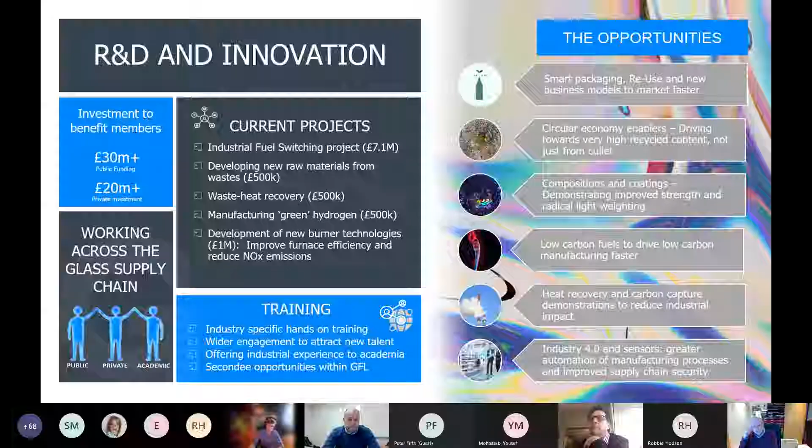To give people an overview of the St Helens pilot plant development, what's important is that over the course of this process, we are co-designing this not just as a Glass Futures internal team, but also utilising the resources and technical expertise of our members, who are heavily involved in a number of extensive design sessions. We also want to open this out to the wider industry in a session like this to ensure that we get the best knowledge and build something that is truly built to serve the industry upon which it is based.

So the facility itself will open in 2023. Over the course of the next 2 years, as you might imagine, with a facility and installation like this and the complexity of such a place, there's a lot of work to do around the design and specification that are being decided and detailed out over the course of this next year.

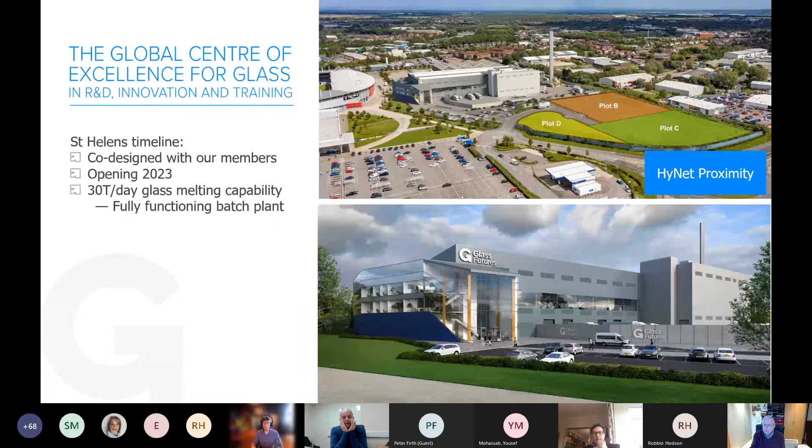So from a lead-in time perspective, and from a building and commission perspective, there's a lot of activity going on at the moment to bring this to reality in 2023. We are building a 30-ton per day glass melting capability, which has got a fully functioning batch plant. Anyone that's in a glass plant will undoubtedly recognise the building that will be seen as the batch plant on the side of that development.

We currently plan on accommodating an IS container forming machine, so we can run production trials and machine developments and hot end developments. What we're also looking at is space accommodation for a rolled plate line to allow us to produce flat and sheet glass as well.

So we've got both capabilities covered to try and really pull together industries that typically have very separate processes. We really see this as an opportunity to have an integrated Industry 4.0 approach.

It is imperative that we build this into the fabric of the facility from day one and allow this to really demonstrate the introduction of new technology to industry. That demonstration space is vitally important.

What we recognise is that the industry is served by its supply chain, and manufacturers more often than not rely on their supply chain to provide them with solutions and technology developments. What we want to be able to offer at this facility is a place for a supply chain to come and demonstrate and develop their equipment as well, and allow them to show it in a working environment so the industry can actually adopt that technology.

This facility will allow for significant amounts of training, and as we've gone through the design process, we've really thought about the way that this building will interact with not only its traditional operators, but also people coming in to learn about what we do and to train on new equipment, or to carry out procedures that typically are only ever done in emergencies in glass plants, in a way that we can actually design those processes and training capabilities in.

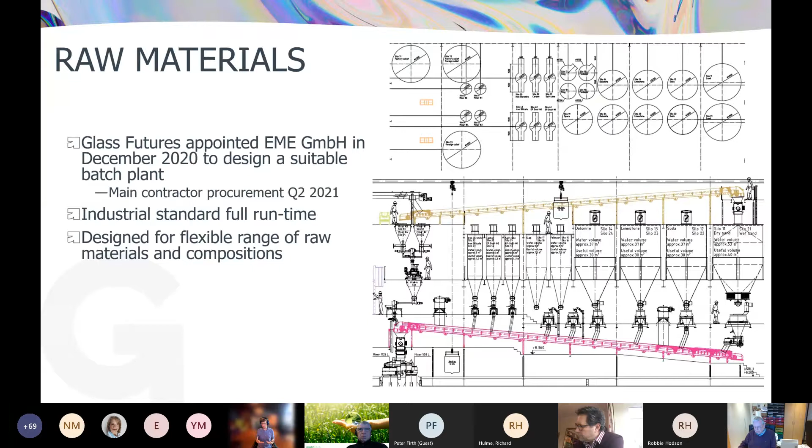What we do need, even though this is a research and development facility—in particular because it's a research and development facility—is an industrial standard of a batch plant. As any batch plant user or manufacturer knows, if you have problems in the batch plant, the rest of the facility stops. So the interesting thing we went through when looking at our initial batch plant concepts and designs is we're slightly opposed, and it's unique as a facility, because this is a research program looking at the ability to trial a flexible range of raw materials and compositions. So even though we need flexibility from a batch plant, we also need the reliability aspect.

You'll see this evident throughout the furnace specifications. When designing a research and development platform, you're not designing a production facility. We used a common phrase inside the design session meetings—sometimes we revert, but the phrase we've used a lot is to take your production hat off. What's interesting is once you start to think about a glass melting facility without the same production pressure of 98% yields must be achieved 24 hours a day, 365 days a year, it starts to open the imagination up to think, what can you actually trial on a furnace like this? What can you put forward that you would never do on a real furnace, or in a real batch plant?

That thought process has been different throughout this entire design process. Some areas give us a lot more freedom and more options. But one of the things we wanted to do with the batch plant was make sure it was capable of running 0% to 100% cullet. And Matthew, I think your question around the 30 ton per day was particularly poignant, because in looking at the furnace specification, we're focusing on a 30 ton per day furnace. The reality is you could put 50 tons a day through it if you so wished.

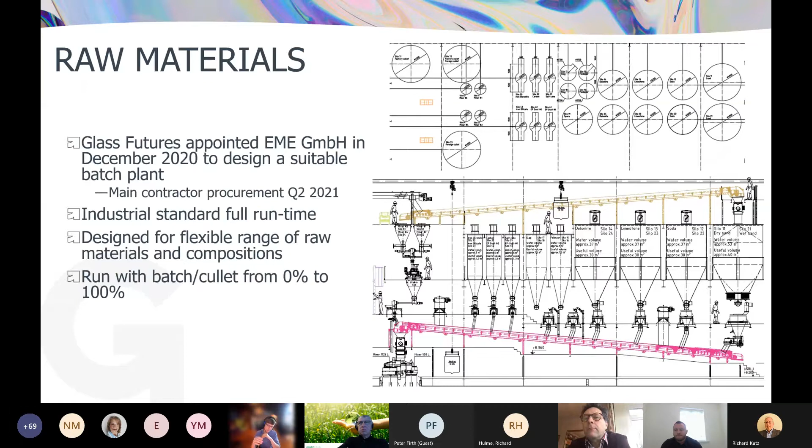In particular, there's a huge amount of interest in new raw materials. This is about not just raw materials being used from different sources, but there may be different grades or different qualities that the industry's never used before, and as such it's risk averse, but also the secondary raw materials areas in particular. I'll discuss this in a second.

Carbonate free materials we know are of great interest overall to the industry. What we recognize is that by having this development platform, we can reduce the risk to any manufacturer and also any raw material supplier to actually come and demonstrably prove the efficacy of that raw material in a proper glass melting process, without having to risk 200 tons a day or 1,000 tons a day of anyone's actual production manufacturing facility. So secondary raw materials at the moment is hugely important.

What's interesting is that often we talk about cullet percentage as our measure of recyclable content, and one of the interesting things that we're starting to see is actually a shift away from just a cullet content, but also a recycled material content. And we recognize that there are a number of materials that are used in the glass sector that are wastes from the steel sector.

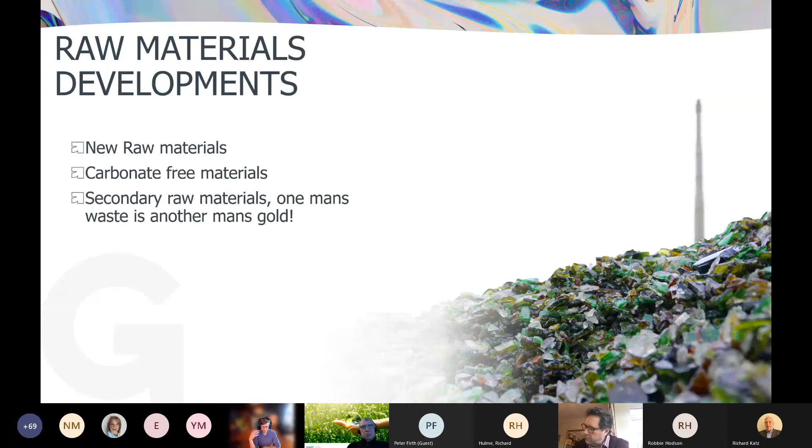And cullet obviously as a raw material. Recycling of EP dust is a standard industry practice. What we see is that there's a huge amount of interest as we look across the circular economy piece to identify what secondary raw materials might exist and actually finding a demonstrable way to actually get them into the industry.

So we do really want to maximise the use of cullet and cullet handling, and we recognise that cullet is about economics and volume, and more often than not, one of the biggest challenges for very high cullet levels is generally decolorizing in flint, as an example.

We have an opportunity within this plant to run small trials and use different raw materials that maybe haven't been used before, and to prove them in a low risk fashion.

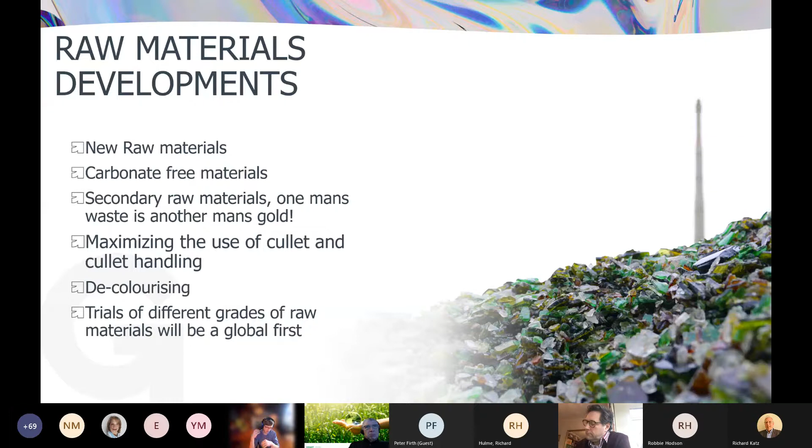We really do think that an at-scale test of different grades of raw materials and different raw materials will be a global first. The risk mitigation that we can have by having a facility where we can afford to lose a couple of days of output, because it's answering a major question that has a significantly higher value to the rest of the industry, is a really positive way for Glass Futures to contribute throughout the supply chain and actually have a very high impact and to remove risk from the industry.

So we can have a little Q&A session now, really around raw materials and the batch plant area in particular, if there's any questions or any misunderstandings.

I think one of the key questions that I wanted to ask out to people overall as a thought process is what are the opportunities that you think we might have missed in this area, if there is any? And I suppose a larger question to the industry overall is, what experimental materials are there in the pipeline across industry that have essentially come to a development stage and then not been allowed to progress further because there wasn't a way to actually get past that demonstration barrier overall.

David, I see you've got your hand up there.

So, hi, Aston. Just a quick question on the batch. Are you considering preheating any raw materials as part of the batch plant design?

So it's definitely something that's come up in the questions overall and that we've discussed. One of the key things that we have looked at is the ability to accommodate a batch preheater around the furnace. As with anything, what we're currently assessing is the business case aspect of it. So, at what scale do we need or require a piece of equipment such as that? Is there a significant interest in the area to actually prove this on scale?

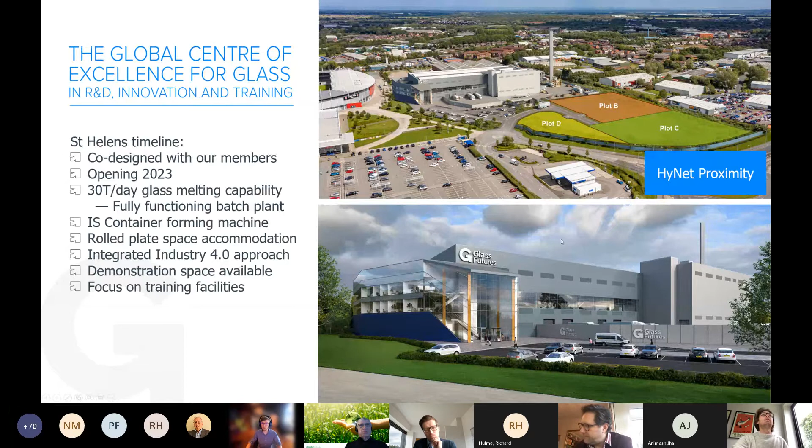If I'm honest, putting together the actual yard design was probably one of the real challenges for the group in the early stages - in particular, how much cullet is too much cullet to store. For a lot of people there's never enough storage, but on the same merit, we're not building a production facility, so do we need to be keeping a huge amount of cullet storage on site? It's about trying to find the balance. I think we've got plenty of space - some people will probably say we have, some might say we haven't.

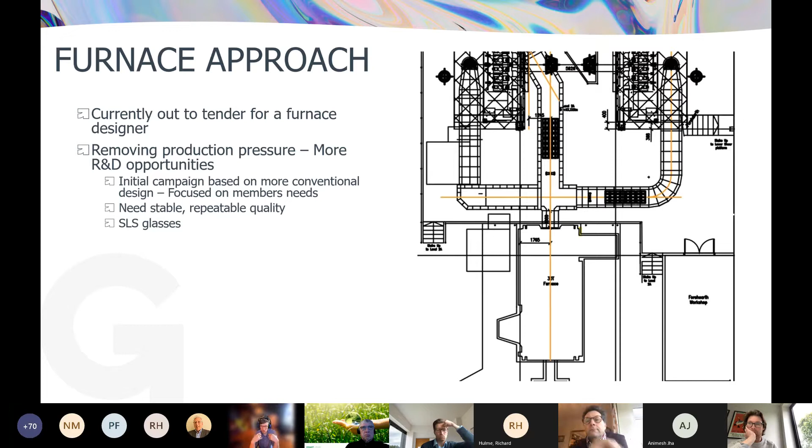Taking your production hat off has been particularly exciting. I'm formerly a batch and furnace person, so this is my area, and to be in open conversation with some of the leading batch and furnace experts around the world, exploring this concept that this does not have to produce 30 tons a day for the next 20 years at a 95% yield. As soon as you move away from that barrier that is synonymous with any furnace built anywhere in the world, you start to recognize significant opportunities that aren't always obvious because it's never been done, it's never been thought about before.

The initial campaign length of the furnace has been a matter for much discussion. One interesting thing we think about is that a furnace built today, any particular or typical plant, might well last until 2040 or 2041. Now, to build a furnace that's going to last for 20 years obviously removes your ability to innovate on a rapid cycle perspective. To change the design of your furnace, you say, right, we've got a better furnace design, we'll wait 18 years until we put it in. It's not allowing the industry to try these new things relatively regularly and quite often.

So as we've gone through this process, the thing we've thought about is what should a campaign length for a research and development platform actually look like? Because we believe if we build a furnace that lasts for 20 years, then we probably aren't innovating or doing too much research and development. We've probably fallen into the same trap that currently stunts the industry's ability to actually change, update, and innovate on a regular basis.

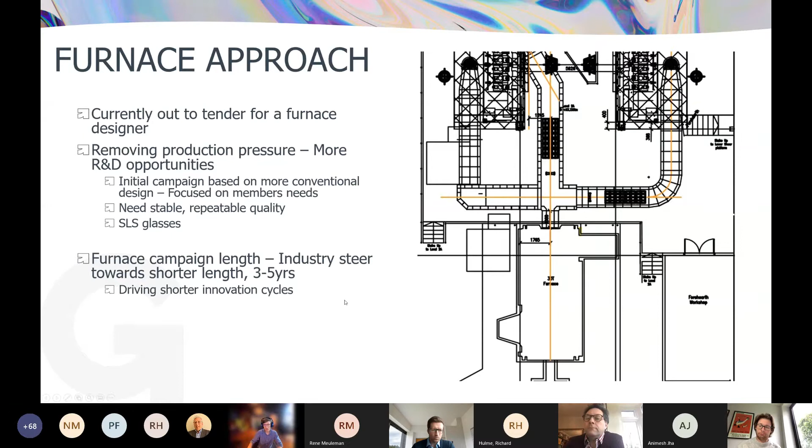Ultimately, this facility is about proving certain technologies. What we recognize is that for the supply chain that produces a lot of the equipment and technology going into the industry, a supplier might turn up wanting to try something new that's never been proven anywhere before. The industry is often risk averse, saying 'show me where it's worked before.' We can work with the supply chain on this furnace to help prove and demonstrate these technologies.

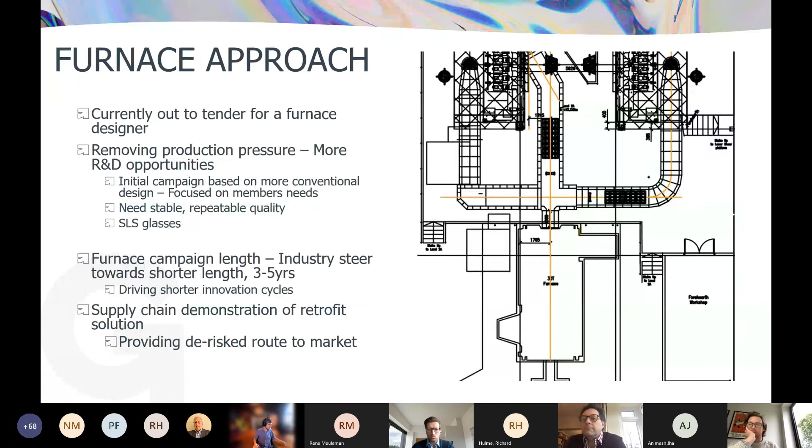I'm going to have to plug my headphones in as well, so I do apologize.

Going through furnace developments we've been looking at, energy sources in particular, low carbon fuels, are a very important topic not just across the glass industry but across society. Hydrogen, biofuels, alternative fuel sources, and electrical boosting all require a huge amount of research and model validation. We don't believe there will be a single solution that fixes everyone's problems. We believe we'll see hybrid fuel and potentially dynamic fuel use across furnaces.

Any furnace operator knows that a gas with changing calorific value generally wreaks havoc on a production process. As autonomy comes into furnace controls, we need a way to demonstrate and allow systems to learn and prove new technologies.

Air, oxygen boosting, and oxy-fired are all technologies utilized across the industry. We recognize we can't do everything at once, so the main thing we're looking at is how to focus on a certain area, concentrate on delivering value there, and then move on to other areas as we go forward.

Energy efficiency and burner developments are absolutely critical. You asked about preheat of raw materials - we recognize heat recovery has always been important for the industry. The ability to prove and demonstrate technologies and business cases is often difficult in real industry, so we think this is a good opportunity to pull those developments forward and offer people high temperature waste gases to prove technologies on.

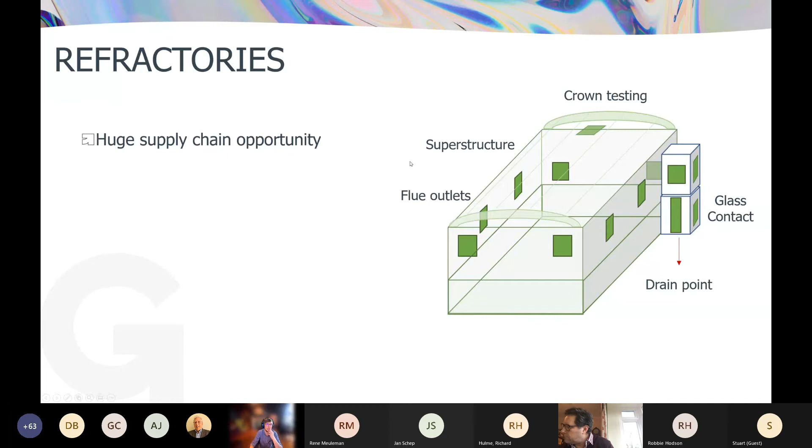So to discuss the refractories aspect, this is an important part, and Richard, you've just picked up on it very well in terms of the specification side. This is an area where, when we say a conventional furnace, it's about understanding what features might maintain it as being seen as conventional for glass melting stability, versus features that are unusual but don't impact its ability to perform industrial fuel switching trials or raw material trials, while giving you an opportunity to do other developments and advancements on the furnace. Even if Glass Futures does build a conventional furnace, I think it would probably still be looked at as very unconventional for a majority of the industry, maybe just conventional from the viewpoint of Glass Futures. This is where we really see a large supply chain opportunity in refractories.

One of the things we're looking at is the design of the experiments we run with relation to fuels and raw materials, but we recognize it as a huge opportunity to run some real in situ refractory tests. I know this is just a very light sketch form at the moment, but we wanted to capture some of the things we've got written down in terms of where the experimental opportunities exist for refractory developments. In particular, there's one main design feature we're currently looking at on the furnace which is significantly different, and this is to essentially have what we're calling a refractory testing pocket.

We've called it an alcove before, but alcove is used by the container industry for a different purpose, so we're not allowed to use that term. This is a refractory testing pocket, essentially, is what we've determined it as.

This is envisaged as being an area of the furnace where we can have a water-cooled dam to close that area off and drain it out. It also provides us with a fixed drain point on the furnace, but the opportunity to actually drop refractories in.

To lift any water jacket off and then run in-situ glass contact refractory tests in that area. One of the things we've discussed is having a stirrer in to ensure we get good circulation, potentially a bubbler to make sure it keeps running, maybe even a burner just to make sure it doesn't get too cold.

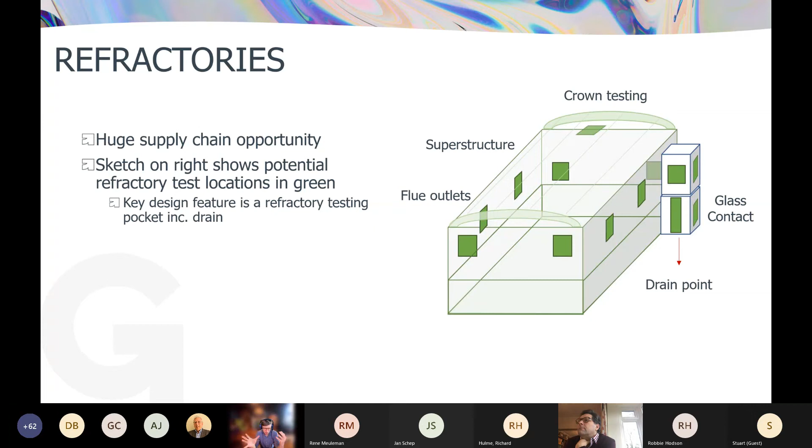The reality is Glass Futures is not a refractory developer or supplier. What we're really looking for is an opportunity to take us away from just ordering something per a specification to deliver what we need, but actually recognising there's a chance here for an industry to develop something at a significantly more rapid rate in an environment that's very close to the industry it serves, in a way that can get demonstrable results and prove what the properties of their refractories actually look like.

We think mouldings and compositions being tested in a live situation is a big possibility. Ultimately, we don't want a glass leak. But what we do recognise is that if we're testing a refractory out and we're a bit unsure or concerned about it, we can put things in place such that if there is an issue, we can shut things down, take the glass level down, remove that contact area, etc.

We are not going to be at the behest of having to get that furnace up and running in the space of 3 hours and doing things just to patch it and fix it. So there's a really good opportunity here to actually try things that aren't necessarily able to be tried in that manufacturing environment.

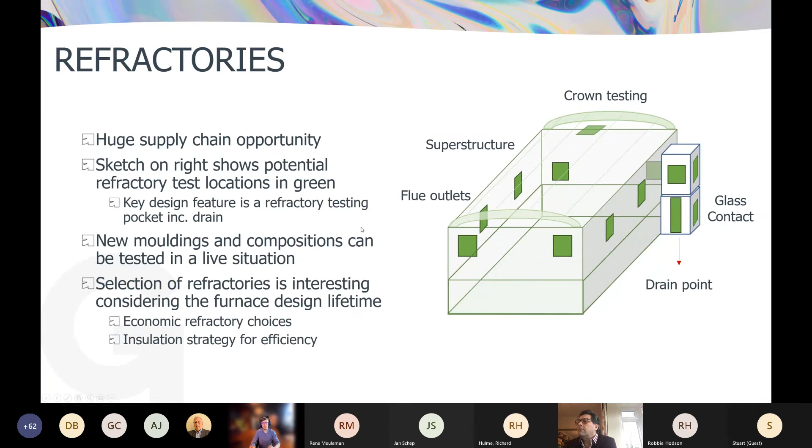And Richard, I know you picked up on it, but in particular the selection of the refractory is interesting - ultimately we're a research and development facility. We have a budget. This is all about choosing something that is economically the right choice and the right specification combined.

What we recognise is that there are a number of different philosophies and approaches we can take. We don't have a fixed one at the moment. Richard, you've got your hand up - I'm quite happy for you to comment on that.

Just so that people in the audience know, I am working as part of Glass Futures, so I'm not just using a cheap ticket to get to the front of the line all the time. I think this is a good example of participation being a really good thing to do, because this alcove idea was there from the very first discussions of Glass Futures, and we were pushing for this and being able to test refractories in exhaust. Other people agree with that philosophy, and so it's become embedded as part of the design.

So anybody who's interested in testing something out, Stuart, more participation is always welcome. So in that case, you should put an electric electrode in it to stir the glass, not a mechanical stirrer. We're always open to taking samples of electrodes or other pieces of kit, Stuart - we'll put that on the list. How about a plasma gas bubbler instead? That's with my Glass Futures hat on, folks.

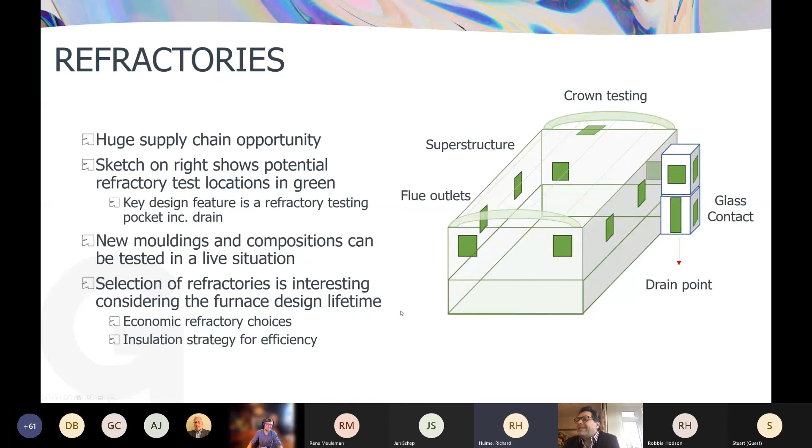In particular in this area, the key things we're looking at is the ability to actually change these refractories out easily on the furnace. Ultimately this is a training and development and research platform. We want to make conditions that make it easier to carry out these trials. The ability to easily remove parts of the superstructure, as an example, is not something you design in a traditional furnace. People don't plan to pull breast walls out of furnaces. The reality is we have an opportunity here to actually design that in at the early stage.

Do we need to? Is there a desire for it? Is it a valuable thing to design in? We're really looking to make sure that anywhere we are going to utilize expenditure on the furnace, it's utilized because there is a clear value to the marketplace. It might help a supplier trial a new technology that hasn't been trialed before, that may well increase its use, might make the industry more efficient or more economic.

So in particular, when you look at the options around the furnace and start to think about it, there's a lot of areas to play with. Batch carryover is a really interesting piece. People don't want to use their own furnace as a batch carryover testing vehicle - more often than not it's not something people want. But what we can do here is find a way to explore these opportunities and run some risks to see what these impacts are like on refractories.

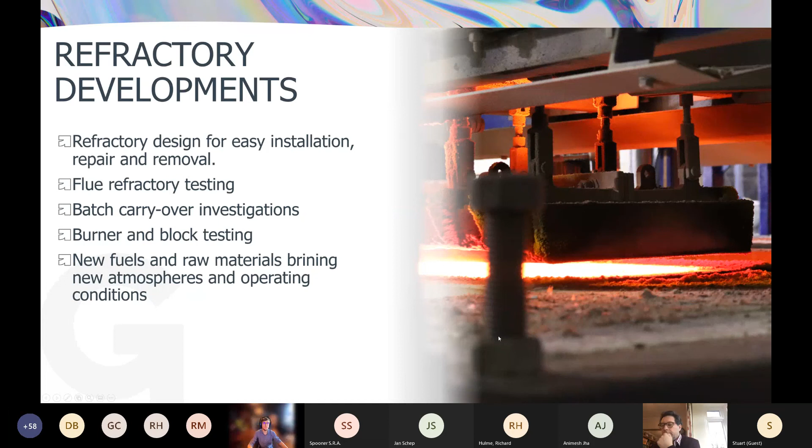In that case, I'll start drawing things to a close overall. I think an important aspect that we'd really like to leave as a lasting message as part of this process in everyone's mind is that the timelines are an important piece to understand. More often than not, when you look at development like this and hear the headline that this is going to open in 2023, it's easy to think that's 2 years away. So what does that leave? What does that mean for me now and over the course of the next year?

I think hopefully what we've been able to do today is show that this design process, this specification process, and understanding what will occur in this facility in 2 years' time is happening now. It's quite often easy to forget that when you see that headline timeline figure of 2023. The design, the specification, the procurement is all happening over the course of this year. As such, we think it's vitally important for people to join Glass Futures and join our smaller, more detailed design sessions, and start running through the mechanics of these pieces. In particular, because those first major projects that we think are going to deliver real value to our members are being formed over the course of this year.

What we've done today is talked about raw materials in the batch plant, the furnace, and the refractories in relation to those. We've got 2 more sessions planned of this current format - this is the first time we've opened up like this, so we wanted to put 3 sessions in. The next one will look at digitization, forming and quality - hot end, cold end - what the production side of the facility will look like and how that might tie into development opportunities. We'll then talk more about people, skills and collaboration on the 31st of March. We decided to split it into these areas because we see them as the big opportunity areas with different supply chains involved overall.